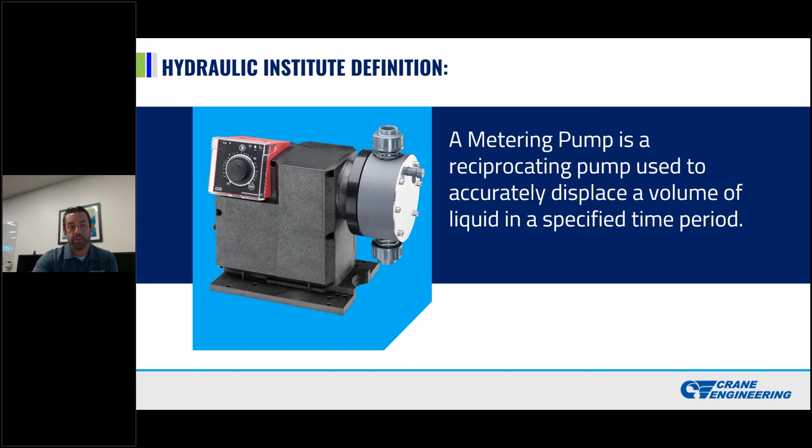Here's a multitude of different styles and configurations. On the left, this blue one is a traditional solenoid pump, a bit older style. These are typically controlled with a stroke frequency, meaning how often the diaphragm moves, and then a stroke length, how far the diaphragm moves. Between those two, you're able to achieve a certain flow rate or set point. These tend to be noisier - every time the solenoid fires, it hammers, so you get a loud clicking noise. That's an easy way to identify a solenoid.

Then you have a mechanical diaphragm. This is a standard motor-driven dosing pump, typically seen a lot in classified explosion-proof applications, so power plants - this is common. Anything that requires an explosion-proof environment, you see a lot of these mechanical diaphragm pumps.

The hydraulic diaphragm you see on the right is typically a higher pressure pump, a little different than the mechanical. They look very similar - it's driven by a standard asynchronous NEMA frame motor, but there's no connection between the diaphragm and the pump end shaft. It's a cavity filled area with oil, and the oil compresses and triggers the diaphragm to move, and that's what creates the higher pressures.

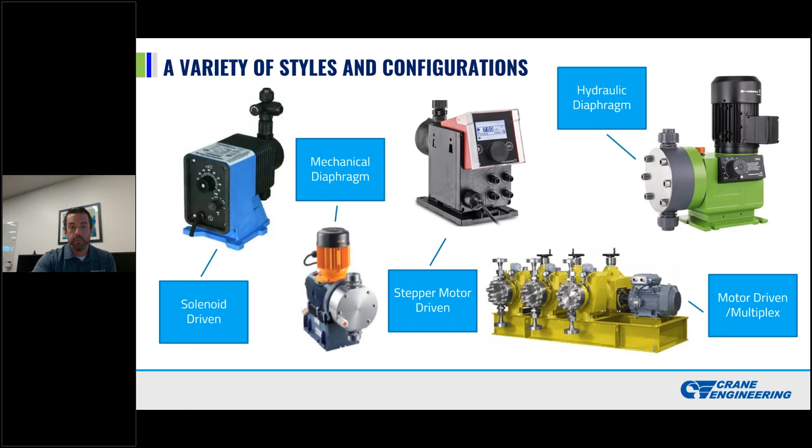Benefits, as I spoke a little bit earlier: dosing pumps are designed for high accuracy. In a given water treatment application, the biggest cost consideration is actually the chemical, not typically any of the equipment or components of the dosing system. So it's very important that the user, the engineer, is able to achieve a high level of accuracy.

Process control - a lot of dosing pumps these days allow for automated control, giving remote control and monitoring. This requires less manual intervention and just a more sustainable and smoother process. These pumps are designed to handle hazardous and expensive chemicals - for pH you have sulfuric acid and caustic, sodium hypo for disinfecting. So the more neat the chemical gets, the more important it is that your dosing pump is selected correctly.

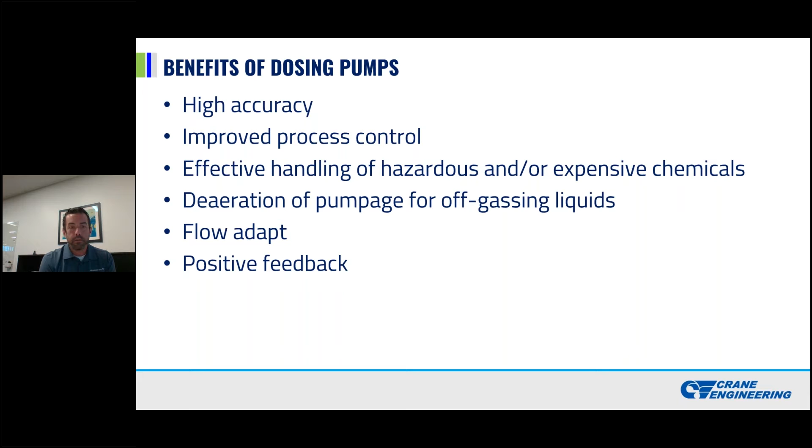Then there's the last two, auto flow adapt and positive feedback, which relate to the second bullet point. They give remote control and monitoring of the system, and develop some brains for the entire process.

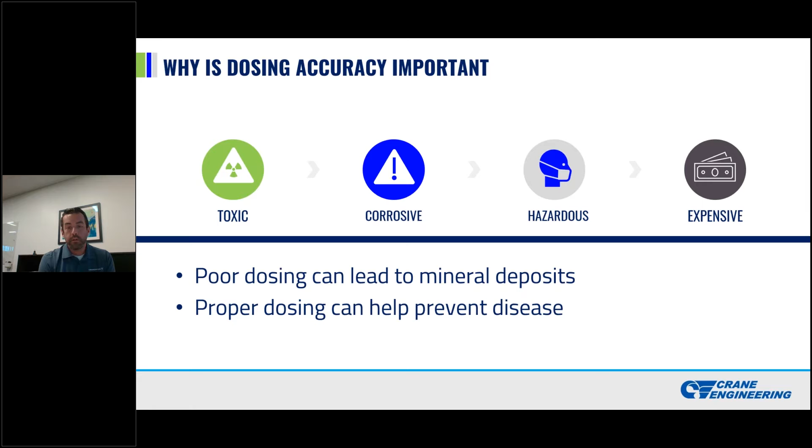So why is this important? As I alluded to in my last slide, you have a lot of hazardous and corrosive environments and chemicals, and accurate dosing helps mitigate some of the extra expenses, both in manpower to deal with materials compatibility concerns, spills, and the extra legwork that comes from those problems. Also, the more accurate the dosing pump is, the less often you're having to replace the chemical, which is a cost savings. If you're dumping too much chemical, as I'll get to in my next slide.

The chemical cost is typically the most important factor. If you underfeed an area, you're under-treating it, so your water is not treated as properly as it should be, which is obviously not good for your system. That creates quality concerns for the product. Then on the other side, if you overfeed, you have the same sort of problems as underfeeding, as you likely have an inferior product. You can run into quality concerns with the water, but that's also a tremendous cost—if you're refilling your chemical tote too often, that's an unnecessary cost.

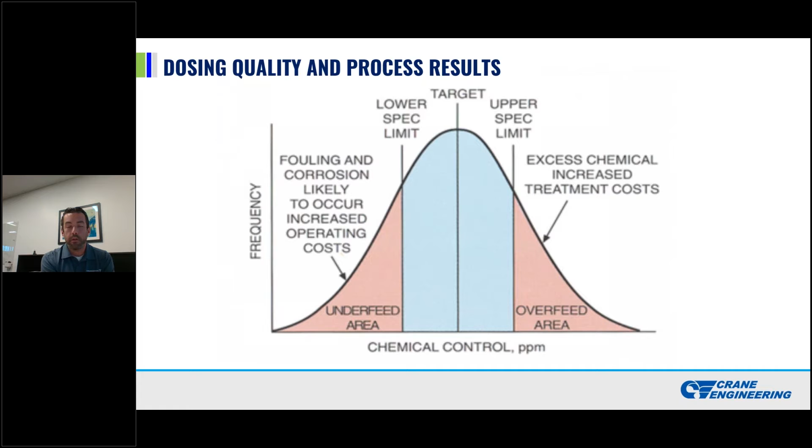So where you want to be is in this blue area—anywhere in here, at the top of the bell curve, ensures the most accurate and target range you want for the chemical metering pumps, to ensure you're getting both a high quality product at the end, while also mitigating some of those chemical costs.

So how is the flow rate determined? This is a multitude of factors, including the amount of flow. You typically have a parts per million that's required, or a concentration of chemical needed to move the pH up or down, or a certain parts per million needed to clean the water. So you typically need to know the flow rate of the process line. There's a typical setup for the pump in which the chemical metering pump is always dosing into a larger process line—you need to know the flow rate of that process. You also need to know the pressure of that line, to be sure the dosing pump is able to overcome the pressure in the process line. Otherwise, you'll just be siphoning water from the process line back into the dosing pump, and that's not a good situation either.

In order to determine flow rate, you need to understand the concentration of your chemical. Typically, the more accurate pump you have, the more neat chemical you can provide. A more neat chemical dumped at a much lower flow rate, while maintaining accuracy, is typically a cost advantageous application. So if you can dose a higher concentration chemical at lower flow rates, you're typically using less chemical, and that's a considerable cost savings measure. So the three big factors are knowing your flow rate and pressures, your chemical concentration, and that helps you determine where you need to be in terms of sizing a dosing pump.

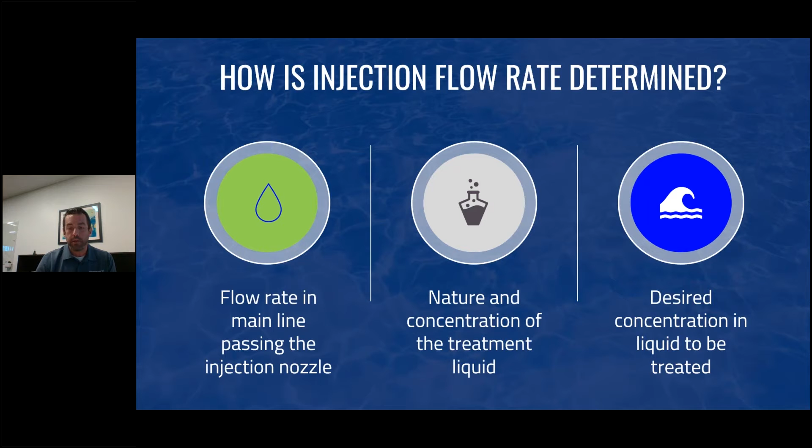One of the biggest issues we're seeing, as it becomes more controlled at a state and federal legislature level, is Legionnaires. Legionella is a bacteria that grows inside system pipings, typically in what we call multi-occupancy buildings—hotels, apartment complexes, hospitals, office buildings, and high rises. It's a bacteria and biofilm that grows on the inside of the piping. Once it breaks off of the piping, it becomes a bacteria that is ingested, not through drinking, but typically through aerosols, through mist. So if you stand outside of a water fountain or water feature and feel the mist, if not treated properly, there could be Legionella bacteria in that mist.

Typical ways to treat Legionella include copper silver treatments and hyperchlorination, where you dump high levels of chlorine into the process. That's often why, if you've ever showered in a hotel and tasted the bleach, that's exactly what that is—they're hyperchlorinating their systems to treat Legionella.

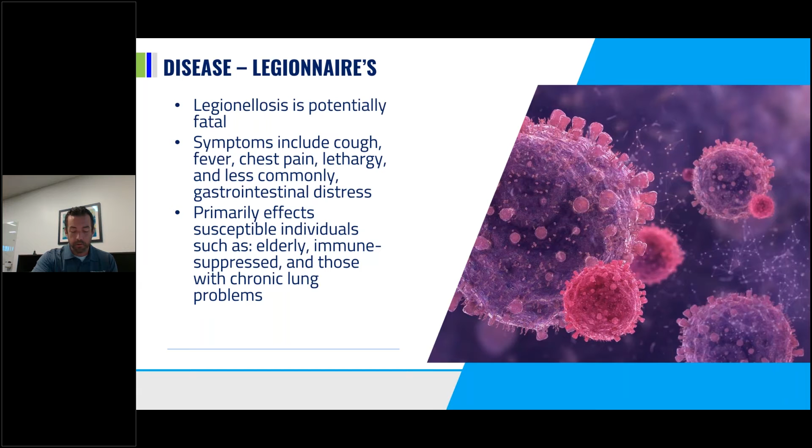So, typical applications—most of this we would call industrial. Common food and beverage, pulp and paper, power plants, those sorts of applications all use some sort of chemical metering, some sort of water treatment.

But for the most part, all the chemicals used are the same. You'll have sodium hypo, typically 12.5%, used for disinfecting or cleaning. You'll have sulfuric acid, typically 93%, used for pH balance as an acid, and then a caustic—I believe 48%—sodium hydroxide, also for pH control.

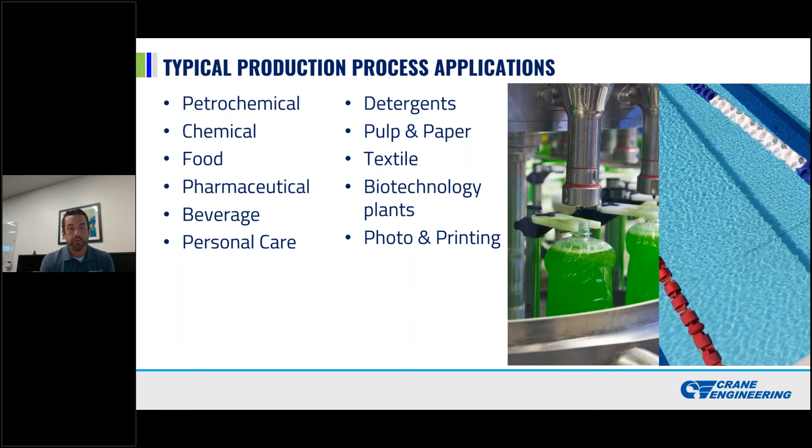So all of these applications, all these end users and markets, will use chemical metering pumps for water treatment. They've all got an influent water, a process they need to treat, and when it becomes effluent, they either reuse it or send it back to the city. Along the way, there are multitudes of different water treatment applications.

So this touches on wastewater a bit more. Wastewater treatment sometimes uses different chemicals than industrial water treatment. Municipal and industrial wastewater use a lot of flocculants—alums and ferric chlorides are very common chemicals to use in the wastewater industry.

What these chemicals try to do is attach themselves to particles in the water, create a heavier solid, and then those particles fall to the bottom. Basically, you're trying to filter out the larger particle size bacterias.

You see a lot of calcium hypochlorite in commercial applications—public water supply, swimming pools, cleaning systems, anything like that. It acts as just a lighter version of water purification, cleaning and scrubbing the water.

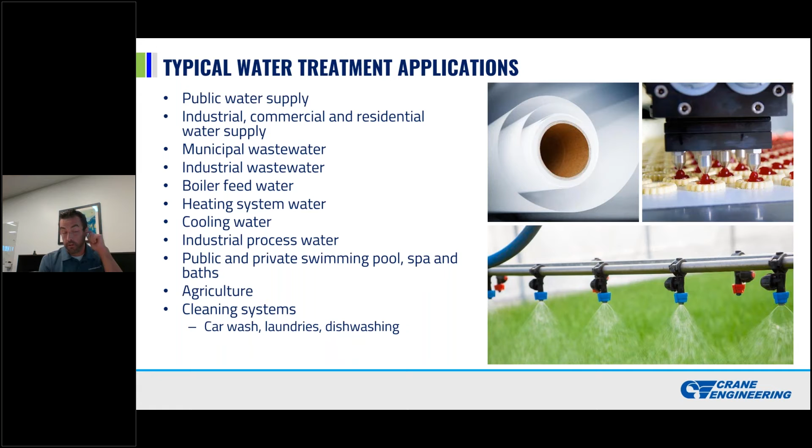So why do we need to treat water? The biggest issue—and all of these touch on different portions of the water treatment process—is you need a properly treated water for whatever your application is. Typically that's for quality control: if you're using the water as a reuse product or as part of your application, the more properly it's treated, the higher the water quality, and at the end of the day, the higher quality end product you'll have.

The other side of this is legislation and governance around dumping water back into the city. The city requires the water, before it's sent back, to be at a certain property, a certain level, in order for there not to be additional fees. So you have to make sure—I'll walk through it.

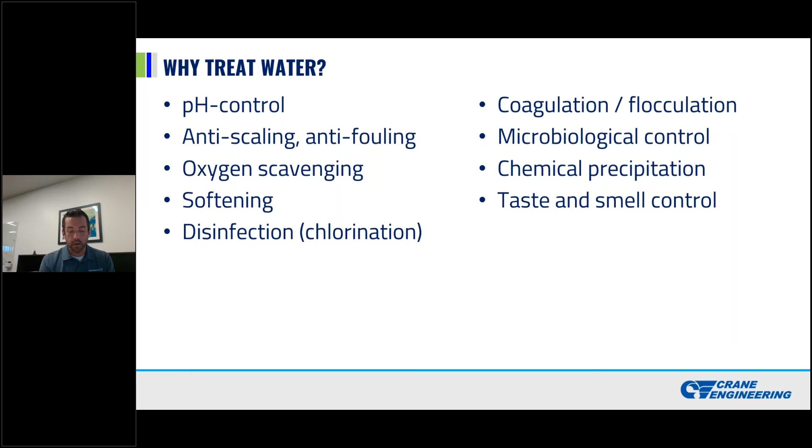Here's the water treatment process at the wastewater level. You start at the beginning with your influent—this is coming from the city, coming from the buildings. The water comes in and goes through what's typically called physical treatment: it goes through screens, then some sort of grease and grit removal, which removes the heavy solids.

Then, as I touched on a minute ago, it goes through a flocculation treatment, where chemicals like alum are added to the process. They attach themselves to the remaining solids, and those solids fall to the bottom.

That water is then treated as sludge, and the remaining water moves on to primary treatment. That's when you add the sodium hypo, adjust the pH as needed, send the water through aeration tanks, and scrub the water. There's all sorts of different processes used along the way to make sure the water remains at a certain quality.

At the end of the day there's two different options. Once you've gone all the way through treatment, you can either dump it back into the city, sending it back into the municipal water system, or what we're seeing a lot more now is water reuse systems. Companies are trying to become more sustainable and less reliant on external resources, so everyone's doing their best to reuse some of the water they've treated. Reused water would go through the process and be recycled to go back through again.

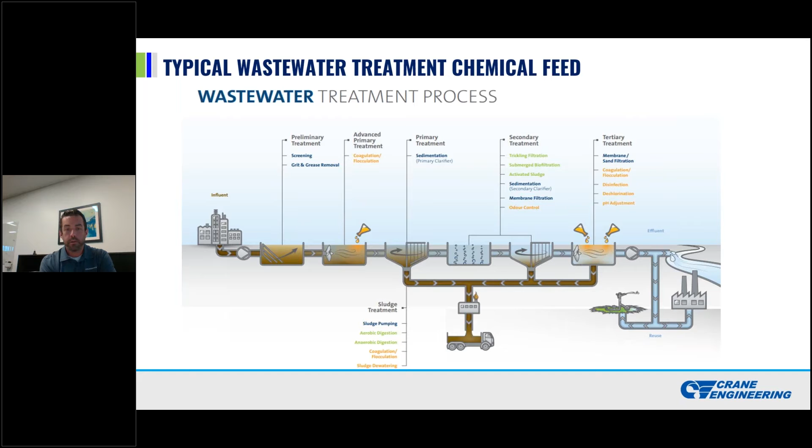This water reuse buzzword is a newer technology, a newer movement, but it's catching on pretty quick. You're seeing a lot of resources utilized trying to implement water reuse systems.

Here's some of the chemicals I've focused on and mentioned a little bit. We call this our 80-20 rule, where roughly 80% of the water treatment industry uses some variation of these. Sodium hydroxide, a caustic, is used in pH adjustment, very common in municipal and industrial. Same thing with sulfuric acid at the bottom, the acid portion of pH control, also used in heavy industrial and municipal.

Sodium hypochlorite is commonly the third among the three. It's the disinfecting bleach, and it's what disinfects the water. Aluminum chloride, also known as alum, is a flocculant. As stated, this is added to the water, attaches itself to the particles within the water, becomes a heavier solid, and falls to the bottom.

Ferrous sulfate is heavily used in municipal applications. It's an odor control substance, so you see this a lot used in local municipalities. Everyone's probably got a local water treatment pump house in their neighborhood or city, and ferrous sulfate would commonly be used as an odor control.

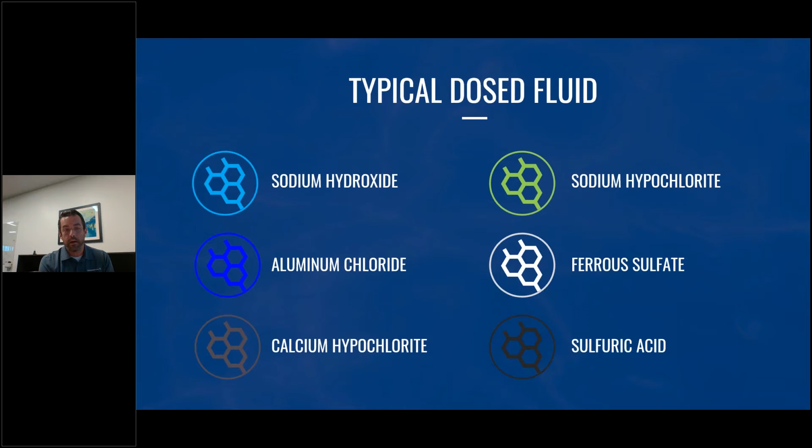Calcium hypochlorite, which I mentioned a little earlier, is commonly used in commercial applications, swimming pools, any sort of potable water where you need to clean and drink or interact with. You see a lot of calcium hypochlorite there.

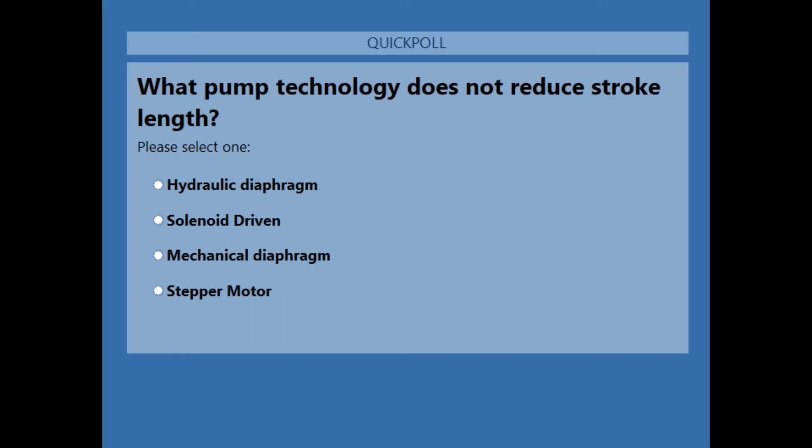So it looks like we've got an array of answers here. The correct answer is stepper motor, which most of you got correct. So let's continue.

Now we're going to jump into dosing pump features and designs. First, we'll talk about the very basic components each dosing pump is going to have. Right now we're looking at a mechanical type diaphragm pump, but these features in some form will be in any of these different designs. You're going to have a motor — this is showing a typical NEMA motor that is C-faced to the drive assembly. Your drive assembly turns that rotary motion into linear motion to get that reciprocating motion. And then you're going to have the liquid end, where your chemical is being processed. We'll get into liquid end design in a little bit.

Typically you're also going to have some different control features. This one in the upper left-hand corner is just showing a manual control knob that would adjust the stroke length.

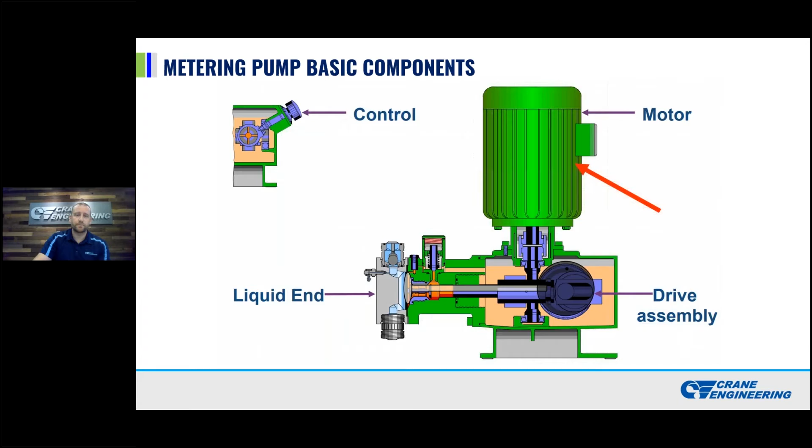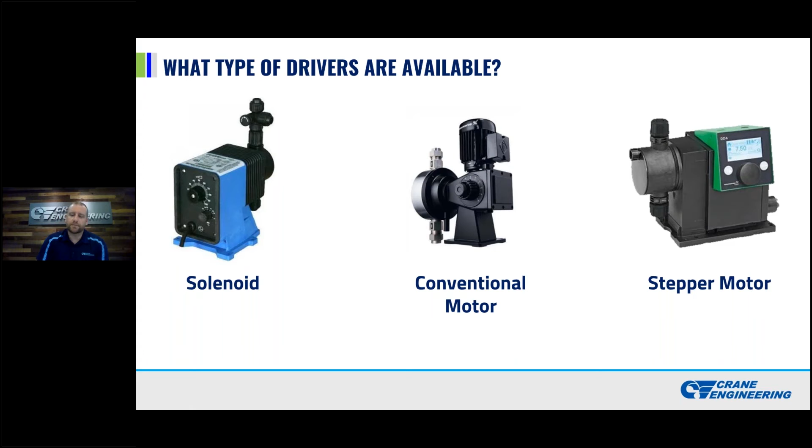So what type of drivers are available? We just looked at a pump with a conventional NEMA frame motor. You've also got the solenoid type and the stepper motor. We're going to take a look at each one of those and how they operate.

Brad broke down already into two different basic types of actuated diaphragm pumps: hydraulically actuated and mechanically actuated. The difference there is how the piston is pushing that diaphragm in and out.

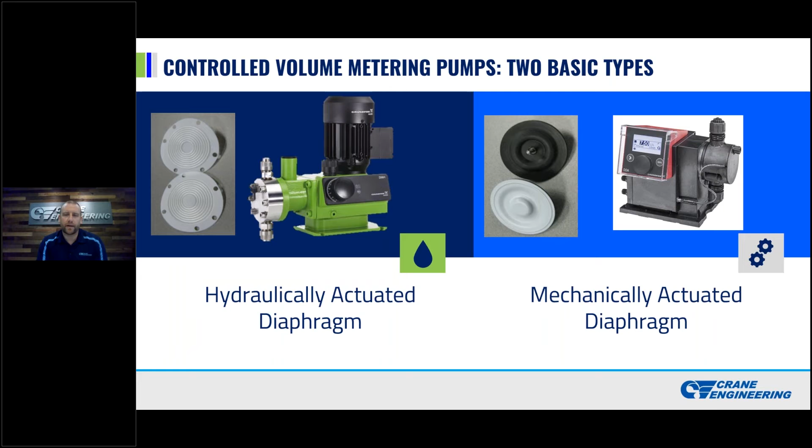First, we'll take a look at a hydraulic diaphragm liquid end. Just talking about the liquid end, a lot of them really look the same across different technologies. Basic components are a suction check valve on the bottom, discharge check valve on the top, and then your diaphragm is in the liquid end, which is what's keeping your liquid from transferring back to the gear case of that pump.

But when we take a look at what the back end of this pump looks like, this is a hydraulic diaphragm pump, and you're going to have a reservoir in between the piston and the diaphragm. That piston is going to be moving in and out, imparting force on the hydraulic liquid, and that's going to push the diaphragm out. Then you'll have a spring return, as well as the piston, when it strokes back, is going to create a suction to assist the diaphragm back.

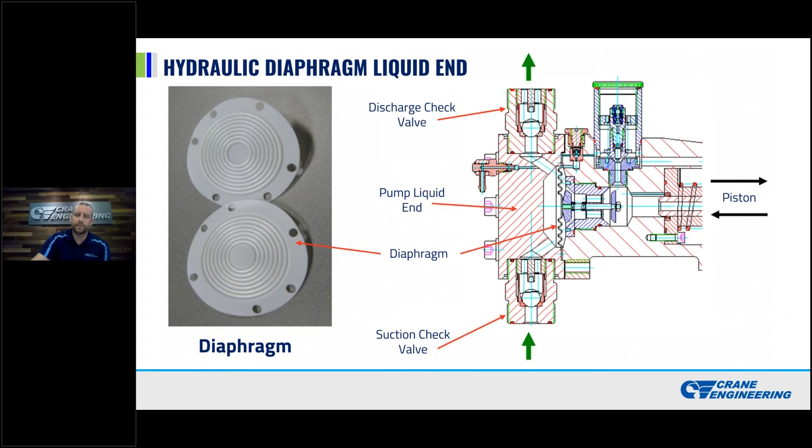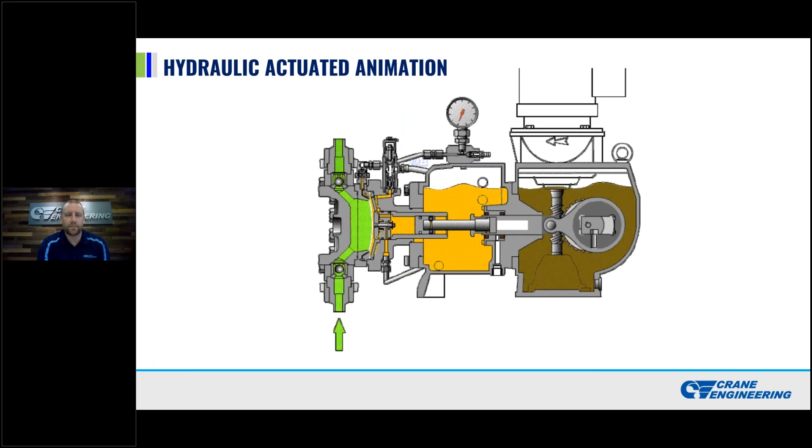So we've got an animation here showing that operation. In the gear case of this pump, you've got a worm gear and then a cam that is pushing that piston in and out, turning it from rotary motion into linear motion. The yellow liquid that's moving around is hydraulic fluid. You can see the pistons compressing it and moving that diaphragm in and out. That bottom check valve will unseat on the stroke back, and then the discharge check valve, when it strokes out, is going to unseat, and you're going to push the liquid through the discharge.

So mechanical diaphragm pump, like I said, the liquid end is going to look very similar. This one has 2 check valves in the picture, but in a mechanical diaphragm pump, the piston is going to be mechanically linked to the diaphragm. Here we're showing a threaded diaphragm shaft off the back of the diaphragm, and you've got a worm gear again with an eccentric gear. That's what's pushing the piston out, and then you've got a spring return that will return the diaphragm.

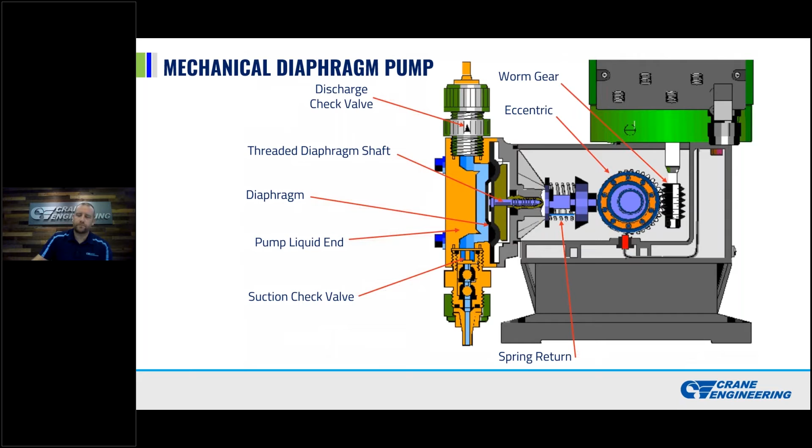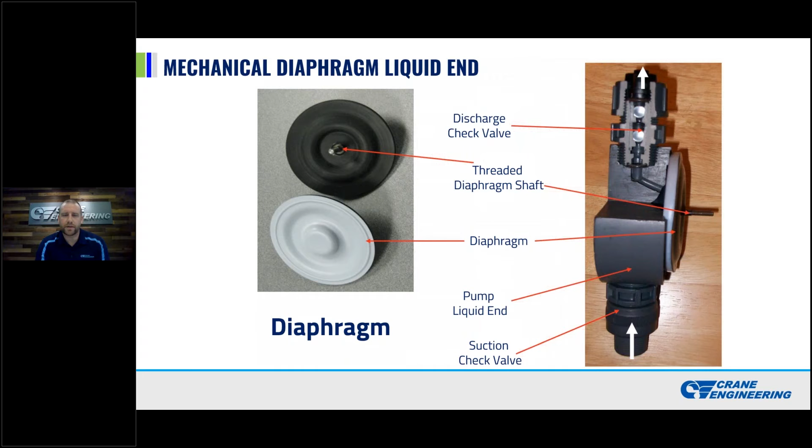Closer look at that liquid end shows you how that threaded diaphragm, the stud, is molded into the diaphragm. Again, we've got a double check valve on this pump on that cutaway, but very similar: suction, discharge check valves, diaphragm, and your liquid end.

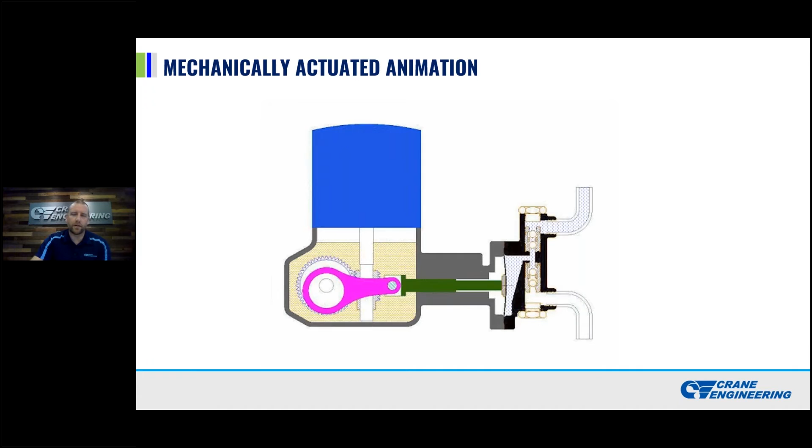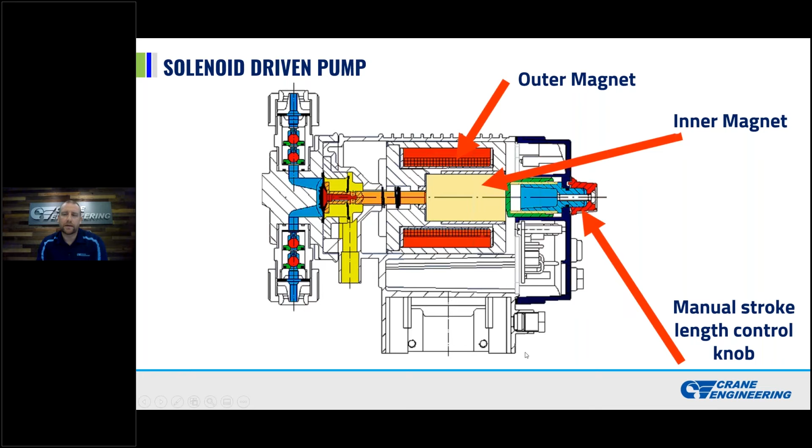We're showing you a manual stroke length adjustment knob on the back, so that's just going to limit how much the length of that stroke, and with each stroke how much displacement there is. A lot of these pumps will also come with a speed control, so you'll not only be able to control the length of the stroke, but also the speed of the stroke to adjust your flow rate.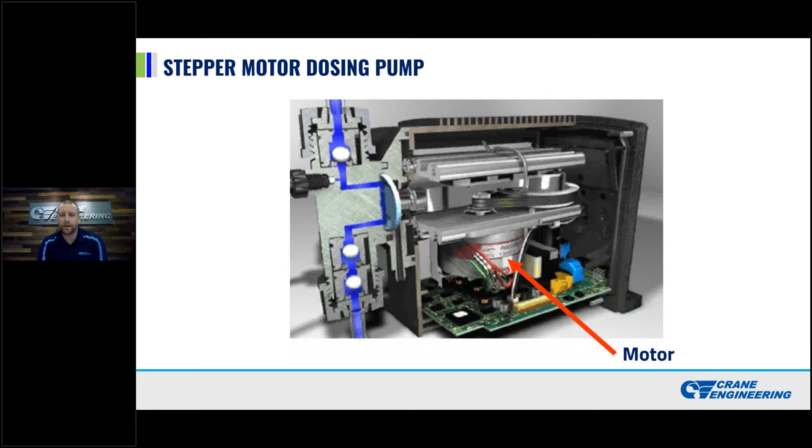And then the last design we're going to cover is the stepper motor. You'll see on the bottom there by the arrow, that is the stepper motor. The shaft is vertical up, and then it's belt driven, and it's hard to see, but that's where you're going to create your linear motion. Taking a look at that technology.

So stepper motor, if you take a look at that top picture, you've got a rotor and then a stator, and the stator has individual windings. You'll notice that the rotor in this depiction has 4 points on it. The individual stator windings, you've got 6 of them. So what happens is you're going to engage those different windings, and because the points are offset, it will slowly rotate as the windings are engaged.

So you're going to have typically a digital interface that's causing those to fire in sequence. On the bottom, you see, we start in the 12 o'clock position, then another set fires, you move to a 10 o'clock position, and then an 8 o'clock position.

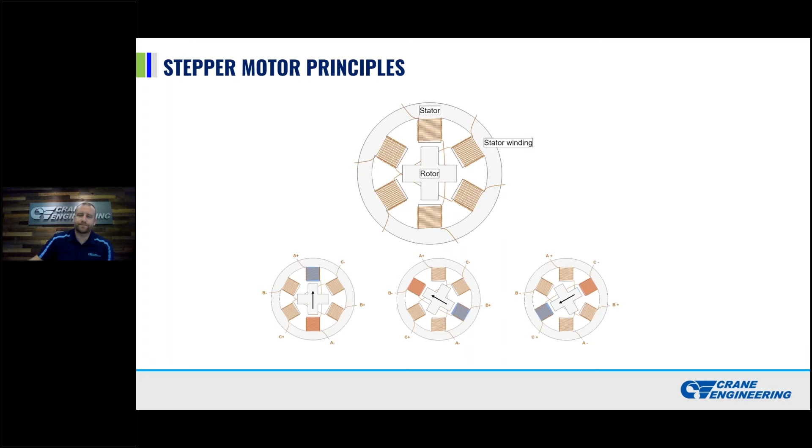Then we've got an animation of what that looks like. In this depiction, there are 8 stator windings, and the rotor has 6 points on it. So you'll see it as those fire, as you ground each phase, it rotates.

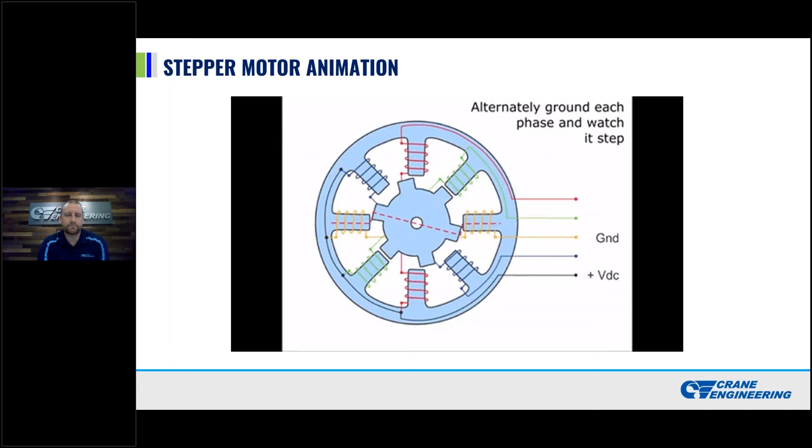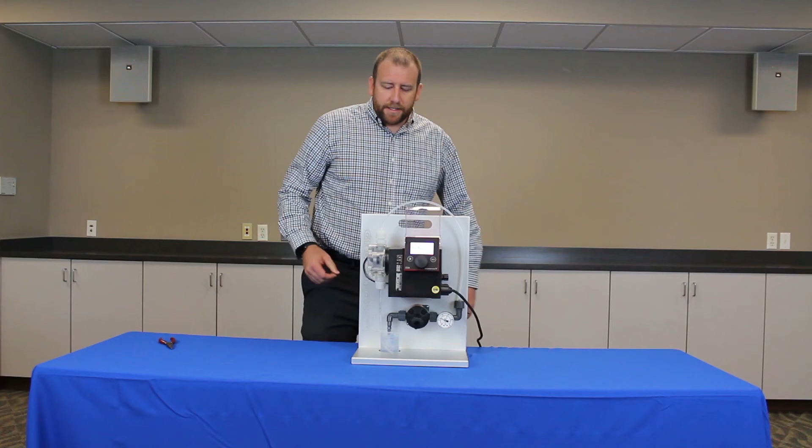So now we're going to have a video that's going to talk a little bit more about the stepper motor, as well as some of the features that you'll find on some of these pumps. Today we're going to take a look at the Grundfos DDA. What we have here is a DDA 7.5-16, a 2 gallon per hour pump. We're going to feature the stepper motor and what that means for pump operation, then talk about some of the features of this pump that can be very helpful for applications.

Now you heard that pump speed up as I turn the dial. The thing to look at in this acrylic head is that the diaphragm, no matter what speed the pump is operating at, with that stepper motor, it's always going to have the full stroke length. It's just how fast that stepper motor is firing. So as you speed up, you'll hear the frequency increase. As you're going faster, the diaphragm moves out faster, but always the same stroke length.

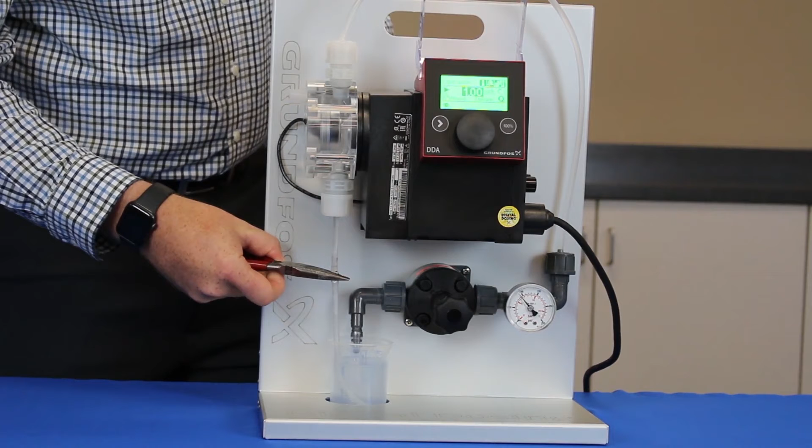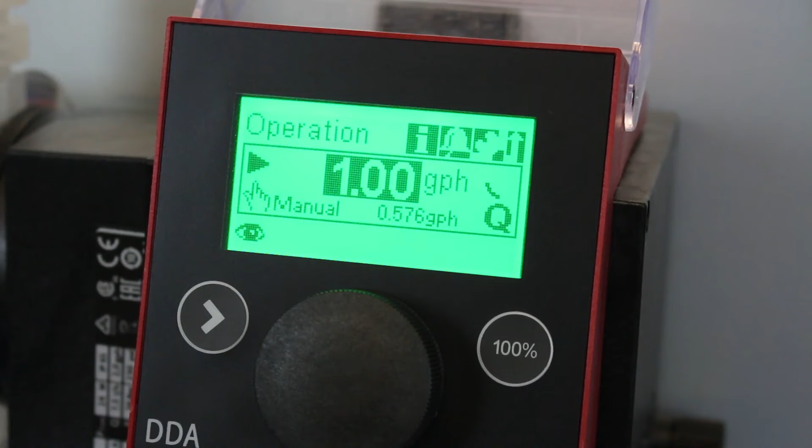Right now in the settings, I have the auto flow adapt turned off, and I'm going to simulate a cavitation event by crimping this suction line. If you look at the interface, I'm requesting 1 gallon per hour, and you can see down below, the flow sensor is telling me I'm currently at 0.5 gallons per hour, and it's dropping. In the head, you can see air bubbles, so it's not fully displacing. It's about half displacing my required flow right now. The pump is not adjusting, and I'm just getting less flow.

If I crimp it all the way down, it will go into alarm mode. So if you've got an alarm cable on here, you can send it back to a control panel to let you know. Otherwise the screen lights up to let you know there's an issue. So I'll let it go and prime again, get back to normal operation.

Then we're going to go into the interface and turn on that auto flow adapt. I go into settings, scroll down, confirm that I want to turn that on. Immediately you hear the speed of the pump change, the frequency. I'm going to get out of this screen, get back to the main screen. You'll see that I'm still requesting 1 gallon per hour.

If I again simulate that cavitation event, as that suction line is not allowed to pull that full flow, the pump will speed up and try to recover, run faster. I crimped it down too hard, so it goes straight into alarm. But if I let it run, the suction line fills, it slows back down. It's sensing we're currently asking for 1 gallon per hour, and that's what it's hitting. If I just loosely crimp down...

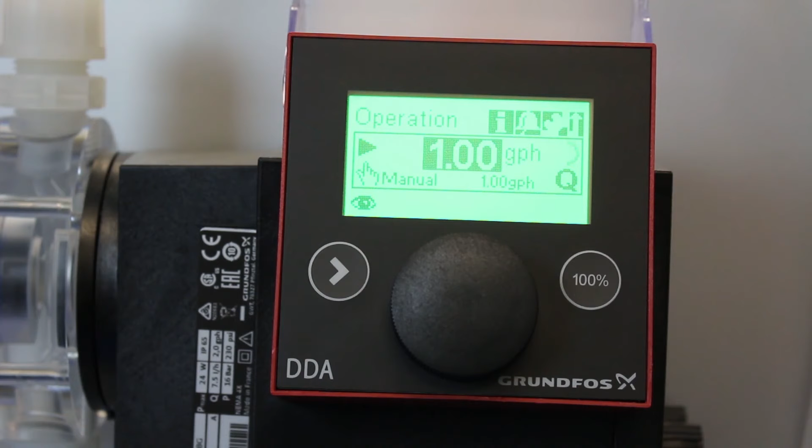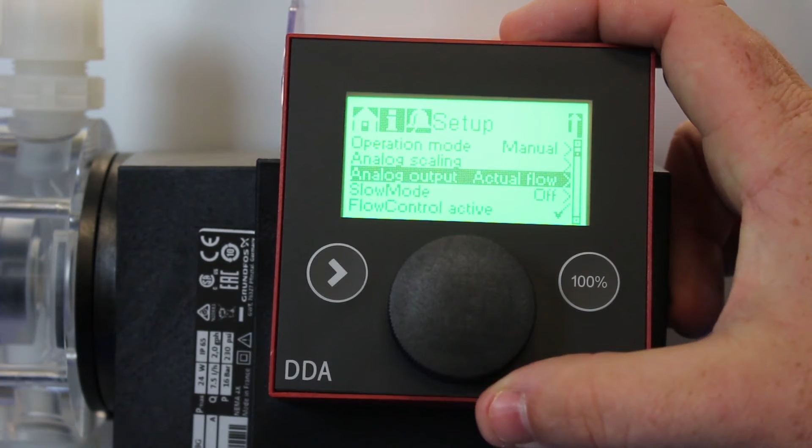Other features I want to show you on this DDA are the flow control features. If I go into settings, I can turn on slow mode, and that can do a few things for you. It helps with off-gassing liquids like hydrogen peroxide or sodium hypochlorite, where when you're shut down it'll build air in the line. It also helps with viscous fluids. If you're trying to pull a viscous fluid in, slow mode creates a longer, more gentle stroke length to encourage that liquid to come in versus just fast, quick strokes.

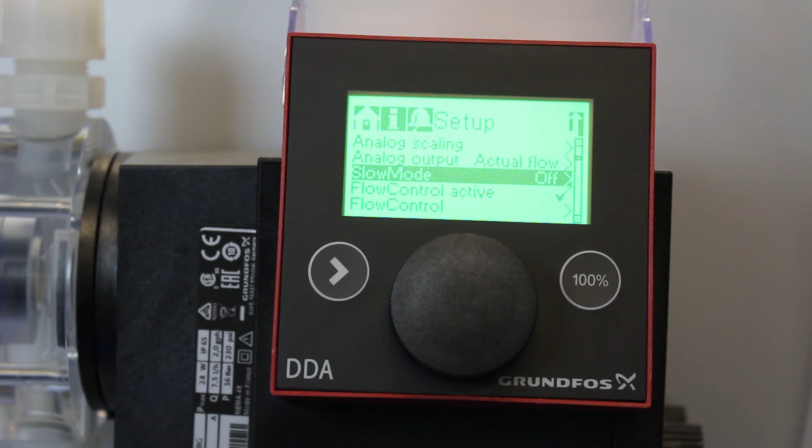The next thing would be the auto de-aeration feature. When you're taking a look at liquids that are off-gassing or have entrained air, a lot of times it'll go into alarm mode and shut the pump down. This feature will encourage those air bubbles to go out of the pump and de-aerate so you can get back to normal operation.

Thanks, Tom. So what I'm going to roll through here is different ways to control the pump, both locally at the pump - how to manipulate the pump, turning the dials, pushing the buttons, what's capable there and how you do that - and Tom showed some of that in his video a second ago. But then also common control features externally, remotely from a PLC or a manned control panel, some of the different inputs and outputs and abilities, ways to control dosing pumps from an external point of view.

There we go. Three main ways to control a dosing pump. First one, most common on a solenoid, like Tom had talked to, is changing the stroke length. That is how far the diaphragm moves from its original origin position point all the way to 100% stroke length. There's the ability to change how far that moves. So hypothetically, if you had an 8 gallon per hour pump and you wanted 4 gallons per hour out of that pump, one way to achieve that is to do 50% stroke length - moving the diaphragm 50% of its total available length, achieving half of the full flow.

The other thing to do is the frequency - so changing how often the diaphragm moves. This is what Grundfos does with our solenoid pumps. This is how far and how often the diaphragm moves. So on the stroke length, you can change how far it moves, and then you can change how often it moves.

So between the two of those, say you had your same 8-gallon per hour pump and needed 2 gallons per hour out of that pump. You can change the pump to run 50% stroke length, which gives you 4 gallons per hour. And then if you did 50% stroke frequency, then that only runs half of the time, so that achieves the other 50% turn down. So you go from your 8-gallon to 2-gallon per hour. You can change that intermittently between applications.

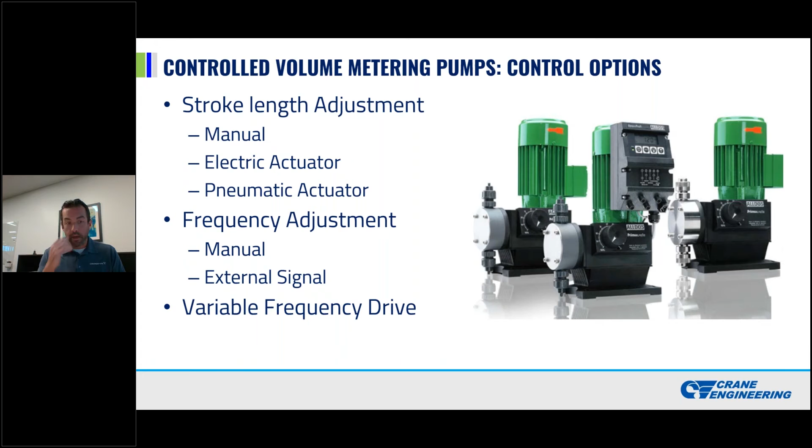Say you had an 8-gallon per hour pump and you wanted 2 gallons per hour, which would be 25% of that rated capacity. You could do 50% stroke length, so the diaphragm moves 50% of its full length ability, and then 50% of the time, so half the time the pump is not running. Run between those two and you get 25%, or in an 8-gallon per hour pump, you get your 2 gallons per hour. Typically that's done locally. This is common on solenoid pumps, which have 2 dials on the face, one for stroke length and the other for stroke frequency. You can adjust the two to dial in the flow rate that's needed.

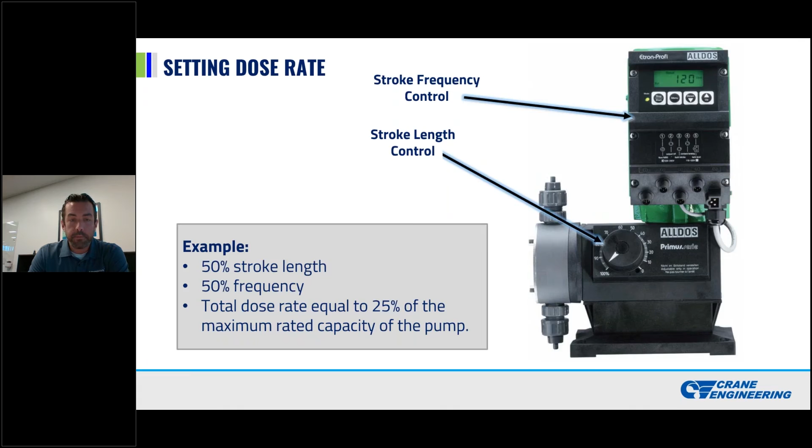Grundfos does a hybrid of the two, as Tom had shown in the video a little bit. Grundfos always does 100% stroke length, so whether it be 8 gallons per hour or 0.8 gallons per hour, utilizing the stepper motor, we always go 100% stroke length. We just change the speed in which the diaphragm moves. So an 8-gallon per hour pump, the diaphragm and piston run at 100% speed as fast as it can. At 50%, say you needed 4 gallons per hour, the pump still runs at 100% discharge stroke length, but half the speed. And if you dialed down further to 2 gallons per hour on the 8-gallon per hour pump, it's still running at 100% discharge stroke length, but now only at 25% speed.

The big advantage there when pumping sodium hypochlorite is that every time you do a discharge stroke, you get all of the air and water that was sucked into the head on the suction stroke pushed out of the head. A lot of times solenoid pumps in sodium hypo applications require what are called degassing valves or air relief valves that install directly on top of the head, allowing entrapped air to be relieved. With the stepper motor technology, that component is not required, as it's built in with 100% discharge stroke length.

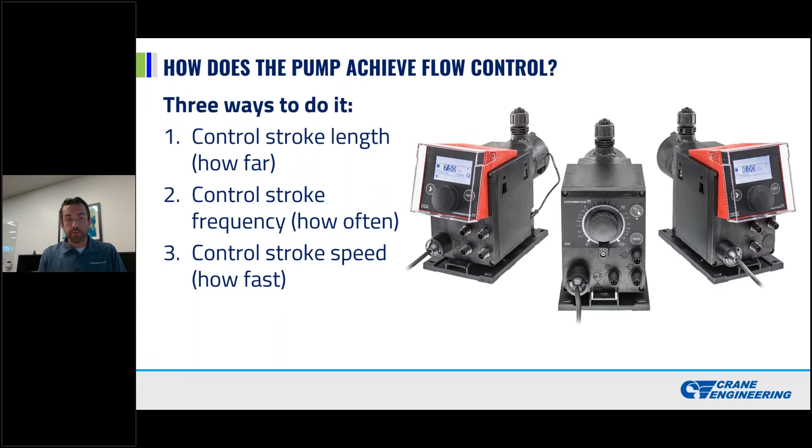On the VFD, it's the same as controlling a VFD on a centrifugal pump—you're just changing the frequency at which the pump runs. Typically they still run at 100% discharge stroke length, but your turn down is variable based on the motor and the drive. On solenoid pumps, I think you're typically 40 to 1 turn down, or 60 or 80 to 1, depending on manufacturer. Stepper motors are anywhere from 800 to 1 all the way up to 3,000 to 1 turn down. So the VFD's turn down ratio is variable depending on the size of the motor, the pump, and the drive itself.

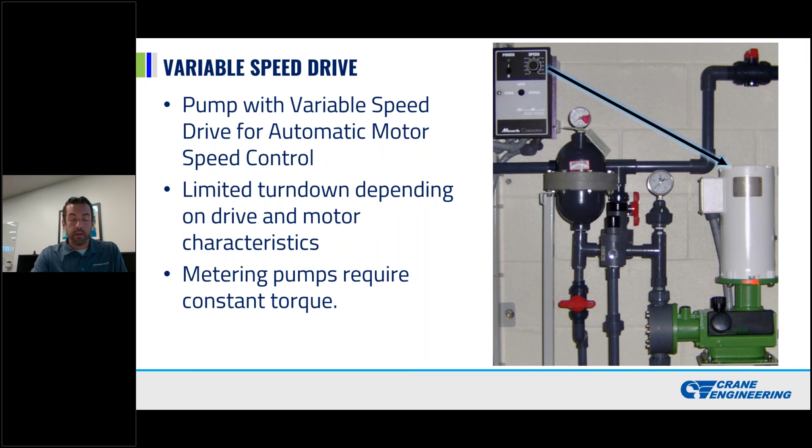The VFD on a dosing pump is a bit older technology—it's not seen as often, most commonly in applications requiring an explosion-proof pump, where the VFD is run outside of the explosion-proof environment. So when you need a variable speed dosing pump inside an explosion-proof application, you'll see a pump similar to what's shown here, whether mechanical or hydraulic, that still needs variable operation. You just put the VFD outside of that enclosed, hazardous environment.

You can have pulse input. This is common in something like floral manufacturing plants inside a greenhouse—every time a vase or container goes underneath an optic signal, the optic signal sends a pulse to the pump, and the pump will dose whatever that feeding chemical is into the vase. So that's a pulse base.

Analog, a lot of times you'll see these are flow paced, so you'll have a process line, and the flow of chemical into the line needs to be linear with the amount of water flow in the process. So the more flow that goes through the process line sends a signal using a flow meter back to the pump, and the pump speeds up as well. When the process line slows down, the signal to the dosing pump slows down as well. That would be a linear relationship.

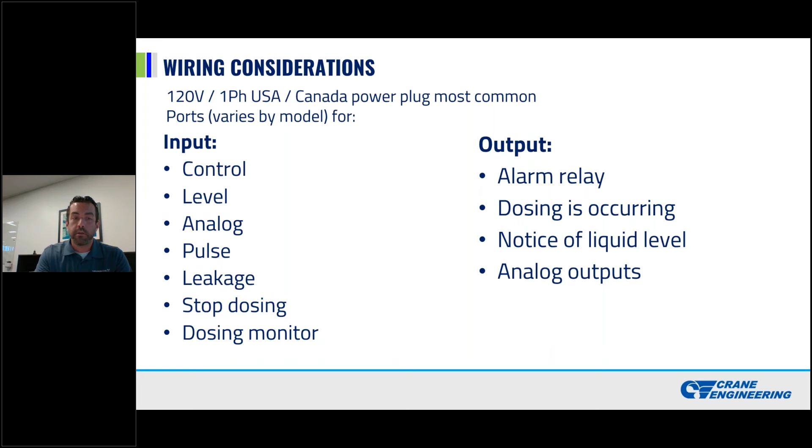And then there's also analog outputs. So your analog outputs could tell you the flow the pump is putting out, the pressure the pump is putting out, or if you're running it on a 4 to 20 input, if your system is signaling 10 milliamps, then there's verification back out from the pump that says the pump is receiving the 10 milliamps. So there's a multitude of different wiring and control considerations for these dosing pumps.

So turn down, I'm not an expert on turn down, it's a very technical discussion, I guess, but basically what turn down does is it provides an area of performability in which the pump can maintain a certain repeatable accuracy, right? So like the last poll question said, in a 10 to 1 turn down, you're going to get anywhere from 1 to 10 gallons at whatever given accuracy that is.

In the stepper motor pumps, on the smaller ones that you see here, we have at 2 gallons per hour a 3,000 to 1 turn down, so that's 0.00067 gallons per hour, all the way up to 2 gallons per hour, which is about a half a teaspoon an hour, and that's plus or minus 1% repeatable accuracy across that range. So what turn down's doing is giving you an area of capable performance from the pump, but still being able to maintain an accurate pump.

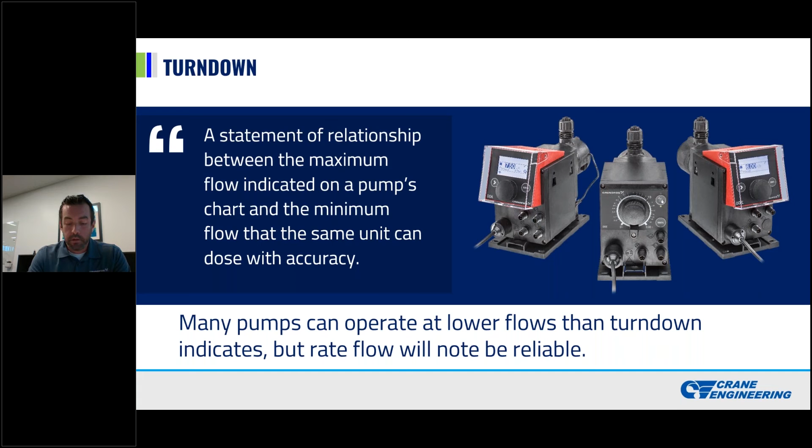After the 3,000 to 1, the stepper motor goes to 1,000 to 1. So if you had an 8 gallon per hour pump running at 1,000 to 1 turn down, you could go anywhere from 8 gallons per hour on the high side to 0.008 gallons per hour on the low side and still maintain that 1% repeatable accuracy within that entire range of 0.008 to 8 gallons per hour. That's kind of the easiest way to explain it. It gets very technical, and honestly, I'm not so versed on that, and that's exactly what this explains here.

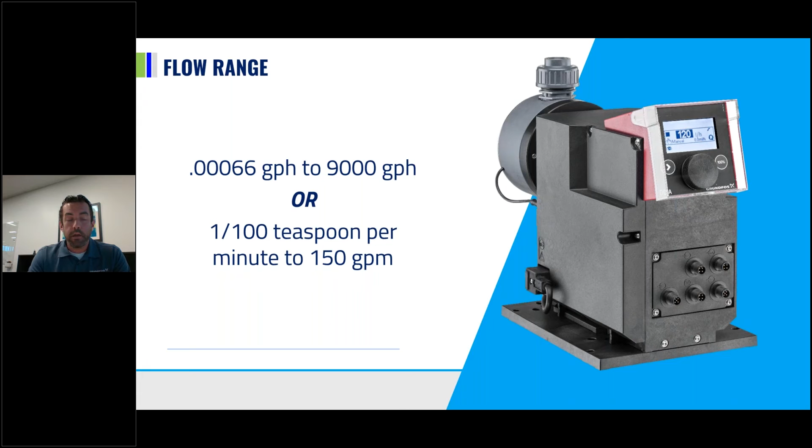So this shows the flow range of dosing pumps: 0.00066 gallons per hour on a small smart digital pump like Grundfos has at that 3,000 to 1 turn down, up to 9,000 gallons per hour, which is one heck of a dosing pump. But anything within that range, there are products out there for it.

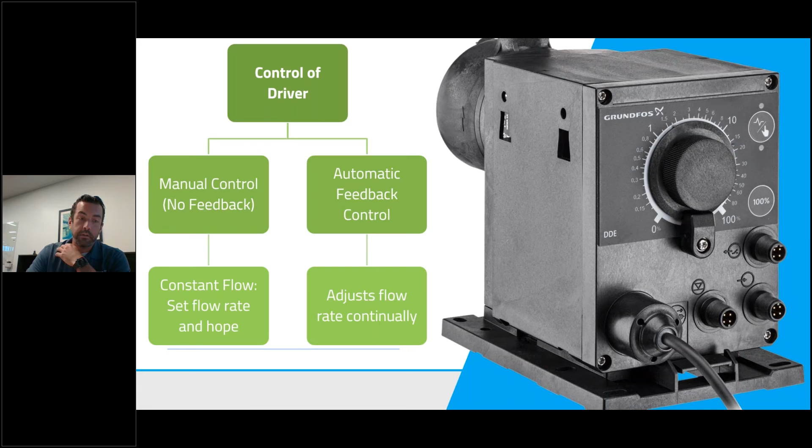These are kind of the inputs and the outputs for your alarms out, your 4 to 20 ins, your pulse signal ins, those sorts of things. This is kind of the interface of the pump.

So considerations for selecting a pump, it's a lot of the same stuff that we get into with centrifugal pumps or other PD pump designs. The one thing I would caution you with a dosing pump is that a lot of time we are handling hazardous chemicals that could potentially hurt somebody. So it's important to get all this information so that you select something that is going to work and not harm anybody.

Right off the bat, you're going to need to know what you want that pump to do. What kind of performance are you looking for? What flow and also what pressure does it need to overcome? Usually when we're looking at dosing pumps, I prefer to size that pump for 90% of the max capacity flow rate you're looking for. It's kind of like when you're selecting a centrifugal pump running at fixed speed - you don't always want to pick the max diameter impeller, just in case you've got future additional demands or you underestimate what kind of flow you need.

Liquid properties - just thinking about all the different things we talked about, off-gassing liquids, hazardous areas. We'll run through a couple of those different liquid properties, but anything that would make the application difficult. Chemical compatibility is very important. You don't want to select a pump that has incorrect liquid end materials or elastomers, which is going to cause that pump to fail quickly.

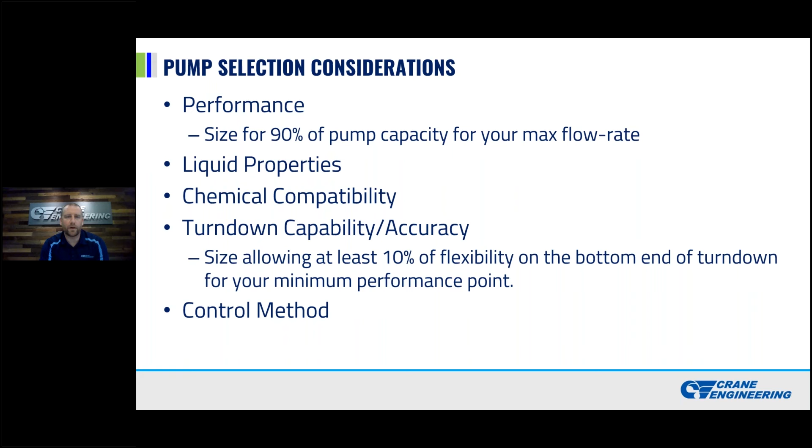Then turndown capability and accuracy. Similar to the first point, you want to give yourself some flexibility on the bottom end. Brad talked about accuracy ranges of pumps. You want to make sure that you can fit that pump in and have your minimum point and give yourself some extra flexibility at the bottom if possible. And then when selecting the pump, the control method - you got to make sure you select that pump the way that you want to adjust it.

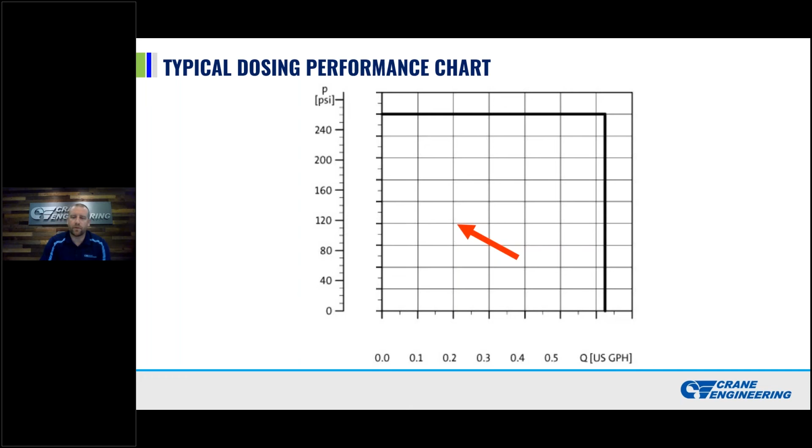So liquid properties, a lot of things to think about. Is it a corrosive liquid? Is it going to be hazardous to people? We got to make sure we select compatible materials that aren't going to react with your pumpage.

Abrasives - this is one we don't run into a whole lot, but if you're handling something like titanium dioxide, bentonite clay slurry, something with diatomaceous earth, you may want to consider potentially going to a larger pump and slowing it down to increase the life of that pump, or potentially maybe even looking at a different technology. Because the area with the checks, the suction and discharge valve, we can tear those up pretty quick in the high pressure areas.

Temperature, just like any pump, it's kind of self-explanatory. Whatever that pump's made out of needs to be able to handle the temperature that you're seeing.

Your viscosity - so this one is kind of twofold. What we're concerned about there is with viscosity, the first thing is being able to prime the pump. If you've got greater suction losses on the suction side, we talked about slow mode on that stepper motor, on that option on that DDA, to help encourage that liquid to pull it into the pump. We're not going to be able to pump that liquid if we can't get it into the pump. And then the second thing with viscosity is with the check valves. If you get over a couple hundred centipoise, you may have problems with those valves seating properly. You may want to take a look at spring-loaded checks.

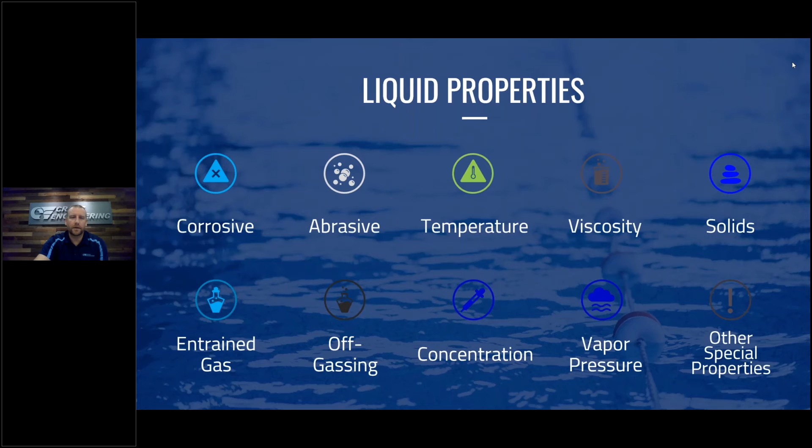In some cases, at the lower concentration, it's okay, and as we increase the concentration, we're probably going to run into problems there. And then also coupling that with temperature - as the temperature increases, some chemicals get more reactive. So you want to consider all three when you're selecting your materials for your pump.

But we can give you recommendations - we look at these different compatibility charts. I prefer, when I'm selecting any pump, dosing pump or other, to start with that manufacturer of the pump I'm looking at. They typically have a chart, so I start there. If I know it's something that's going to be difficult to handle, I may look at a secondary chart.

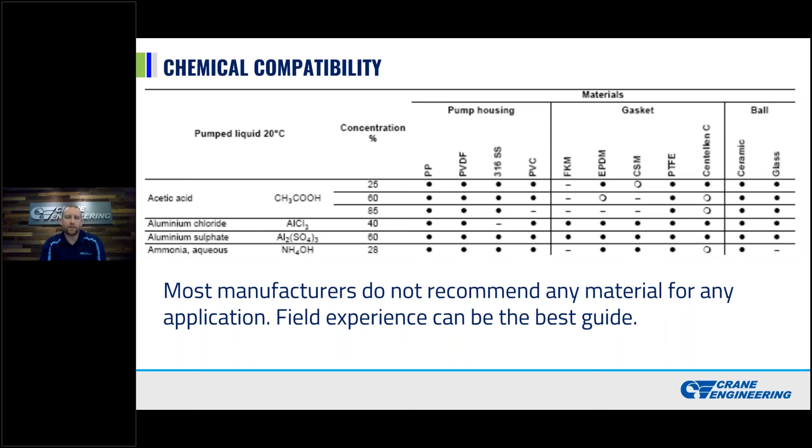Obviously, we want an excellent rating. In some cases, we will go to a good rating if it's a very difficult chemical, and depending on what options are available with that pump.

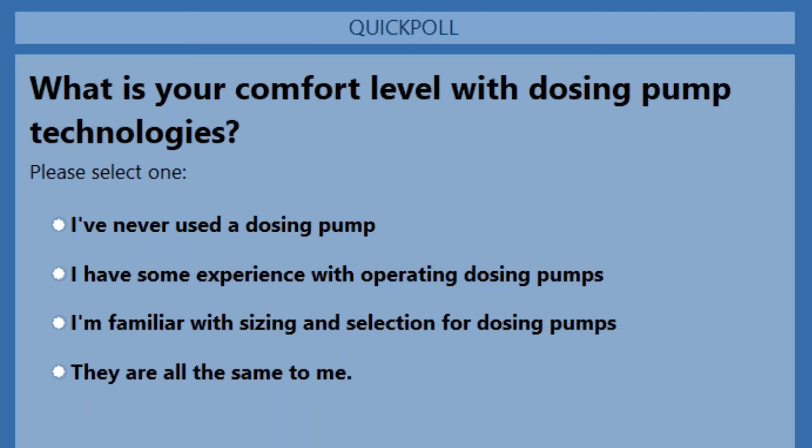So we come to our last polling question, and the question is: what is your comfort level with dosing pump technologies? I've never used a dosing pump. I have some experience with operating dosing pumps. I'm familiar with sizing and selection for dosing pumps. They're all the same to me.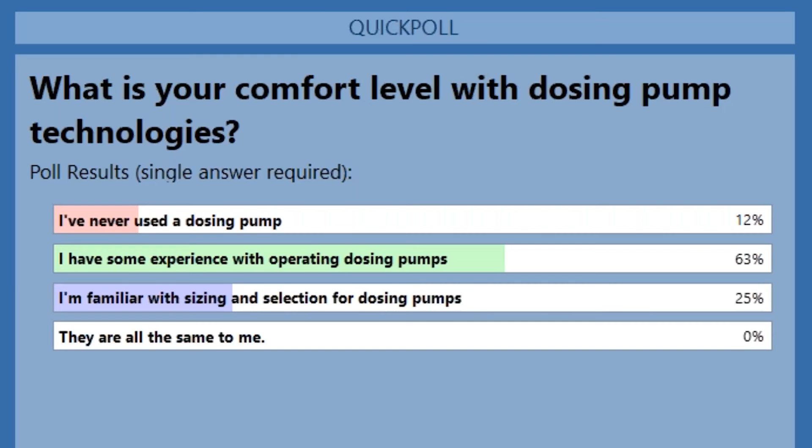So it looks like we've got a range. I am glad to see that they're not all the same to everybody, especially since we just went through all the features and control where they're used. So that is good.

Okay, so I'm going to turn it over to Brad for installation and piping practice. Yeah, I think this should finish out the presentation, so thanks everyone for hanging in. I'm going to run through some installation, good and bad, where we see some problems, some easy things to overcome. I know installation is a big part of some of the issues that people have. Material compatibility and then how to properly install these things is often an issue, and I don't think I have control - oh, there we go.

So starting here, this is the typical system components—all of the components that are typically needed. Number 1 is the chemical tank, where the chemical would be housed. Number 2 is a mixer, so typically you want to agitate the chemical a little bit just so it stays fluid, doesn't coagulate, and stays good. Number 3 is a calibration column.

This is important to make sure the pump is properly calibrated. This goes back to correctly using a pump for high accuracy, because chemical is probably the most expensive component of a water treatment system. All pumps, at least from Grundfos, and I'd bet from all manufacturers, are calibrated at the factory with water. But water has different properties than a caustic or sulfuric chemical, so it's important that once the pump gets to the field, it's calibrated for the liquid it's going to pump in that application. That ensures the pump operates as it should.

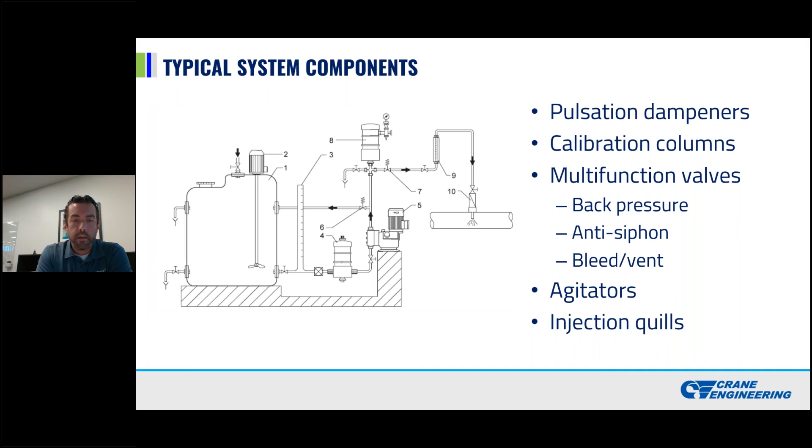You're not buying a pump from the pump manufacturer and the tank from a tank guy, kind of piecemealing this thing together. When you supply skidded systems, there's assurance that all the components are properly engineered and supplied for that specific application. So that's also something to consider. It takes a little bit of the liability off the user and more onto the supplier and manufacturer when you go with a skidded system.

So this is a very basic setup. This would signify your pump, this is your chemical tote down here, and this would be a suction lift application, which most of these pumps are. There was a question earlier about suction length—that's variable based on the installation. The better the system and installation, the longer your suction length can be, and the straighter your suction tubing or piping is, the longer that suction length could be. Most suction side questions are around suction lift.

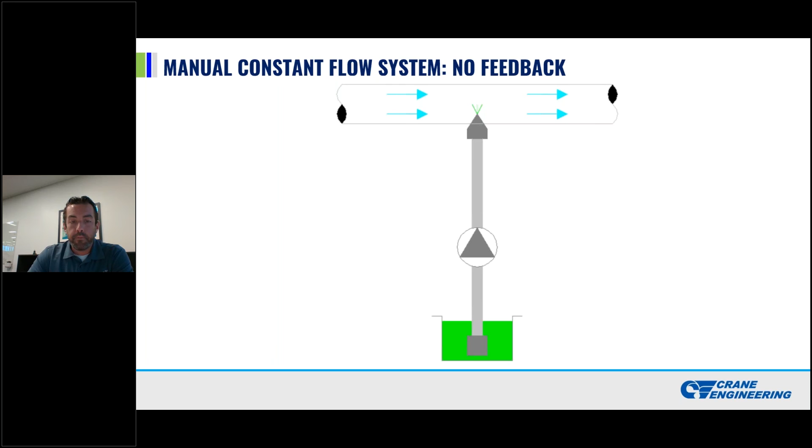So how far up can a dosing pump pull the chemical? That's variable per manufacturer. Grundfos is 18 feet with wetted check balls, and I think 3 meters, about 9 feet, without. I'm not too familiar with other manufacturers, but suction lengths depend on the manufacturer. So this is a very basic manual setup—you've got a pump here, you're going to operate it locally, and it's going to dose chemical from this green tank into the process line. That's about as basic as it gets.

So here's kind of a typical feedback system. This is where you're controlling the pump externally, monitoring it externally, and it's being operated with a controller.

Some sort of monitoring control device, like Hach, is common in the wastewater industry for residual readers. It measures a certain parts per million or chemical property in the line, determines that additional chemical is needed, and sends a signal to the pump, which operates accordingly. That would be an automated system in which this controller is utilizing the sensor. The sensor sends a signal to the controller, the controller generates a 4 to 20 input signal to the pump, and the pump operates based on that feedback.

Same sort of install here, though. One thing I didn't point out in the last slides is every vertical installation where the pump is pulling from a tank requires a foot valve. This foot valve acts as a check valve in the bottom of the tank. Once the pump is primed, a properly working foot valve will maintain prime in the suction line, both the line in the tank and the line into the pump.

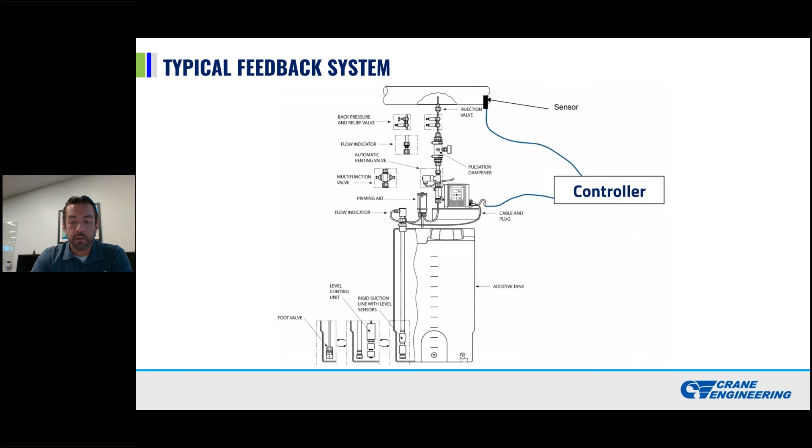Without a check valve in the bottom of the tank, after you achieve prime, all of the liquid that's primed in the line is just going to fall back into the tank, and you're going to find yourself repriming over and over. So anytime there's suction side disturbances, it's either one of two things, and that's one of them - a faulty check valve or a check valve that's gooped up with crystallized chemical or something along those lines. That's one thing I always recommend checking and flushing out - the foot valve with suction side problems.

This is a basic diagram of the automated control system as well. You've got a sensor on the intake side measuring a certain parts per million, and one on the discharge side, and they're sending signals via a controller back to the pump to increase or decrease flow to maintain a given set point or residual in the process line.

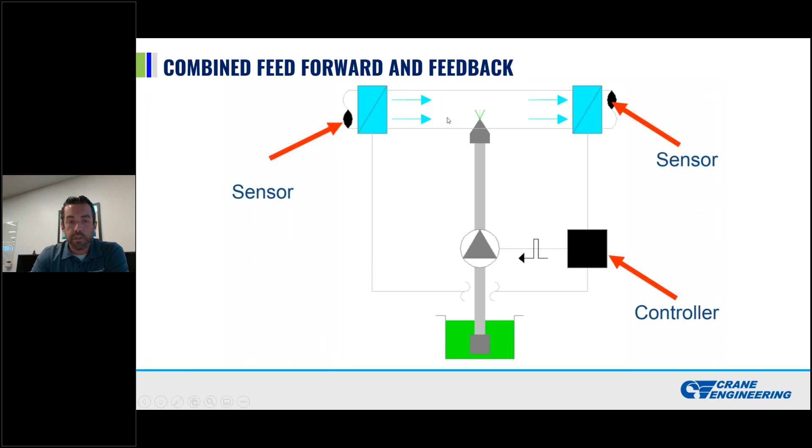Here's another standard installation tank. The foot valve, like I said, is critical to maintain prime in the line. You've got your dosing pump, your injection quill, which has a check valve in there as well, and it injects chemical into the line and prevents siphoning back into the pump system.

So here's the other problem with suction side. Even in situations where there is a foot valve, step number one is to make sure your foot valve is clean, it's clear, and it's not goopy. The second is to look at the suction line. As you can see in my previous slides, ideally you want a vertical line from the tank to the injection point. Here's where we run into big time air problems.

Even when you do prime a line, you run into situations where air gets in the line, especially when the suction tubing is coiled up. So you've got a straight line into your tank, you've got the pump sitting up here, but then you have suction side tubing that's just coiled. Well, it's impossible to keep that prime because the air always floats to the top, and then you create all sorts of suction side air problems.

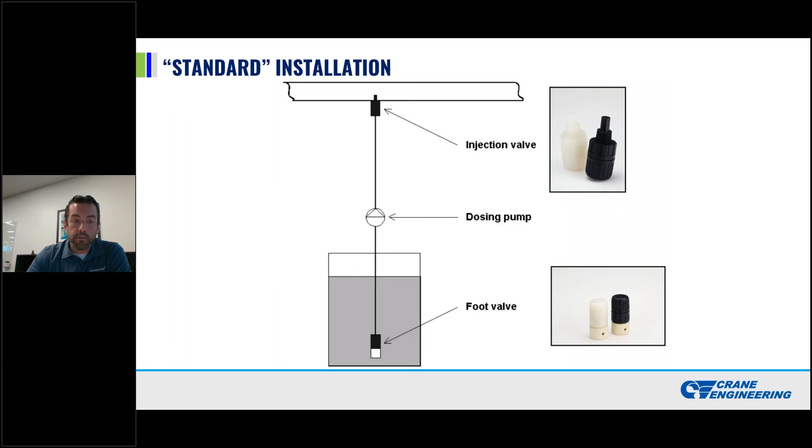These are bad. Anytime you can straighten out the relationship between the injection valve, the pump, and the foot valve and create something very linear like this, it's an ideal situation - these are not. You want to keep as much vertical rise in the suction side as you can. The discharge side's not as important because, in a properly designed system, there's adequate back pressure onto the discharge line, typically 30 to 45 pounds. That helps prevent some of the air - that properly pressurized discharge line. It's the suction line that gives us the most problems.

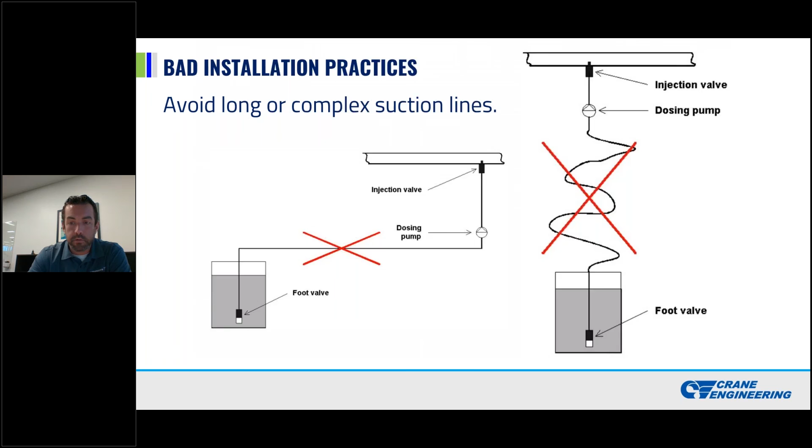So this goes back into the question from earlier about large suction heights. The only reason we recommend a shorter suction line in a situation like this is we would always recommend the pump be closer to the tank as possible, because the suction line is what always gives the bigger problems. The discharge line should always be pressurized, and the longer you can keep that pressurized run on the discharge side, the shorter the suction side, which will always eliminate or reduce the number of suction side disturbances.

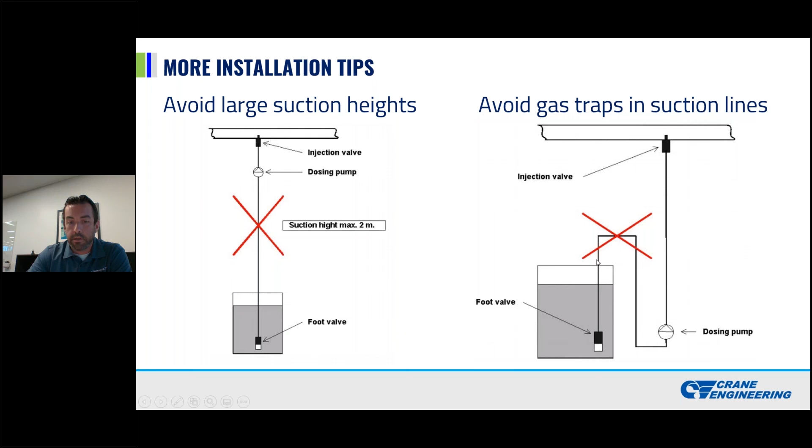So in any situation like this where you have to have a pump below the tank, I would always recommend a flooded suction application, where your chemical comes off the side of the tank and fills the dosing pump with positive pressure. Make sure the top of the tank is vented so you have atmospheric pressure pushing chemical into the tank or into the pump. This setup here is no good and will always give you air problems. Any sort of bends like this on the suction side are always our biggest issues.

We also see this a lot where there's a chemical that needs to be agitated, either because it's not run very often, or it's some sort of viscous polymer that you want to keep agitated so it doesn't gum up. In those situations where you have a mixer or agitator in the line, always be sure to use a rigid suction line. Otherwise, as the agitator spins, it's going to pull this suction line and probably wrap it around the tank or the mixer, which is never a good situation. So anytime you have an agitator, make sure you have a rigid suction line.

It could even be just a PVC shield over tubing, which is fine. And then keep your foot valve 3 to 6 inches off the bottom. This helps keep debris and goopy stuff from getting into the bottom of the foot valve.

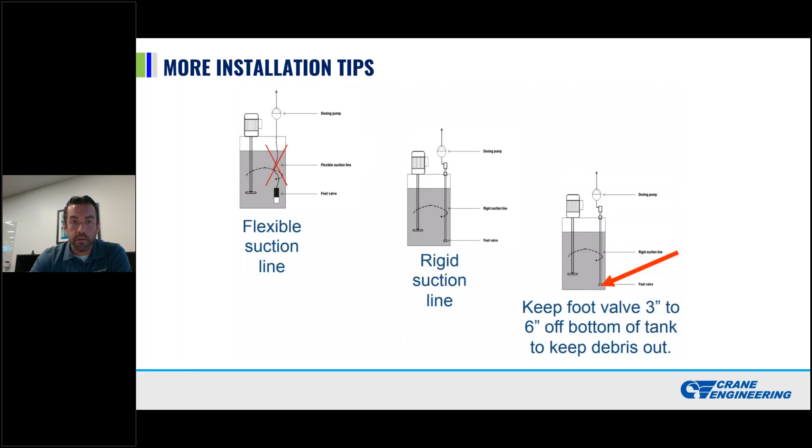Okay, just to recap our objectives — if we didn't cover something, I'd invite you to throw a question in the chat box. But I think we hit on most of these points: describing where and why dosing pumps are used, explaining the mechanics of a common dosing pump design, demonstrating basic steps to select the pump, describing typical control methods, and Brad closed it out with identifying good installation and piping practices.

So now we will take a look at what kind of questions we have and see if we can answer those. All right, thank you Tom and Brad. We do have a few questions here that came in, so I'll tee a few up for you guys. A couple were addressed already — there were some questions about maximum suction length and ideas for proper installation, and I think Brad did a good job covering those already.

But here's one: a customer is asking, between diaphragm pumps and stepper motor pumps, what percent of customers are buying stepper motor pumps? They're wondering, if they're still using a diaphragm pump instead of a stepper motor, are they using outdated technology?

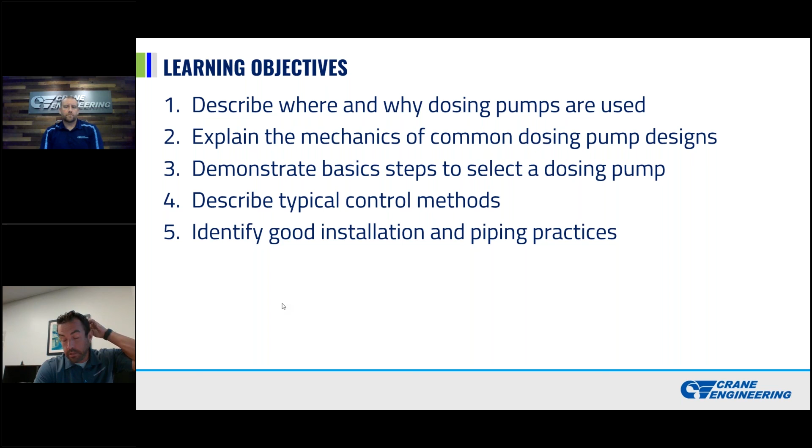If there's a diaphragm tear, or say you get some goop in the head and the check valves aren't seating properly so they don't sit back down, the pump will notice a pressure loss and signify that the check valves are bad. So even if that's before 8,000 hours, the pump will tell you there's a check valve failure and that you need to replace them, and it gives you that 8-digit part number to call Crane and order.

But then at 10,000 hours, say you ignore it at 8,000 hours, at 10,000 hours it'll go into another alarm telling you to do it again. You can ignore it - my rule of thumb is if you're not having any performance issues, ignore it. As easy as maintenance is on these pumps, you can swap out a repair kit in less than an hour. So if it's not broken, don't fix it, but the pump will tell you if it's broken before 8,000 hours, or tell you to do preventative maintenance at 8,000.

Perfect, thanks, Brad. As an add-on to that, if applied properly with correct materials, installation's good, and PMs are done as recommended, what's the typical life expectancy for a dosing pump?

Yeah, I get asked this a lot. I don't think we publish anything because I think then we assume liability there. Years and years - 6 or 8 years, maybe 5 or 6 years. I've seen them last forever. But I don't think we publish average life expectancy, just because that gets us in trouble with warranty issues - if a pump doesn't make it 6 years or whatever, people look at us. So I'll double check, but I don't think we publish that, and I don't know that I have a good number there.